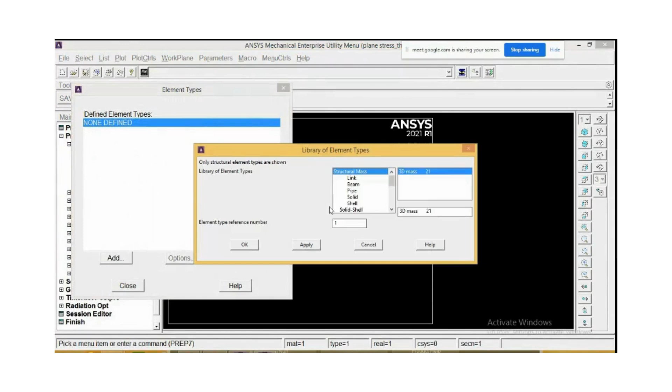Now we are solving a plane stress problem for the thin pressure vessel. For that purpose, obviously, preference is structural. Okay, preprocessor. Under element type, we will add a solid element, PLANE182 quad. Go to the options, make the element behavior plane stress with thickness. Okay, close that element. Real constant.

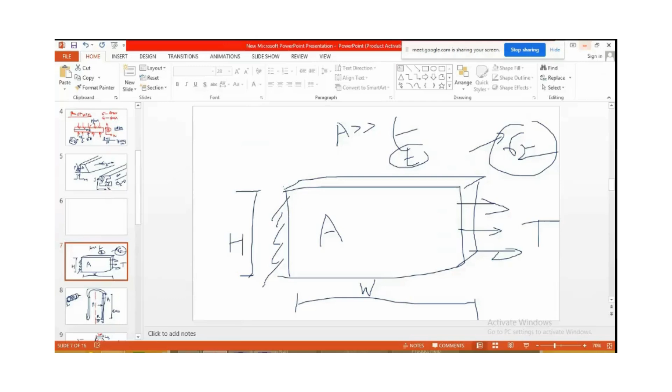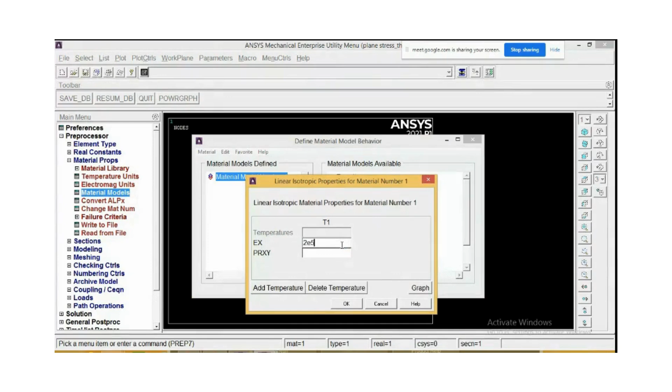We are doing the axisymmetric problem. You observe here for the pressure vessel, we are plotting the area and we will plot the result for 360 degrees by considering one single strip. So we will not give a real constant as input. Directly we go to the material property, material model, structural linear elastic isotropic, 2E5 and 0.3 as Poisson's ratio. Okay, material model is defined.

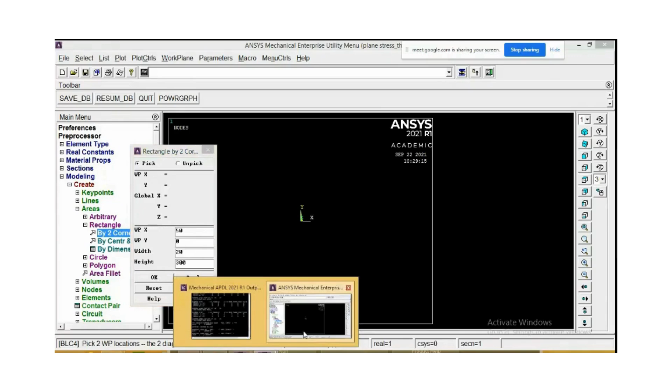Now modeling, create area by two corners. Radius is 50, so x will be 50, y will be 0, width is suppose 20 and height is 300. Okay, so it will plot this strip, this area. Once you click on OK, right now this is the thickness, you get the strip. Because the pressure vessel is subject to internal pressure, it is an axisymmetric problem. So about the y-axis it is symmetric, right?

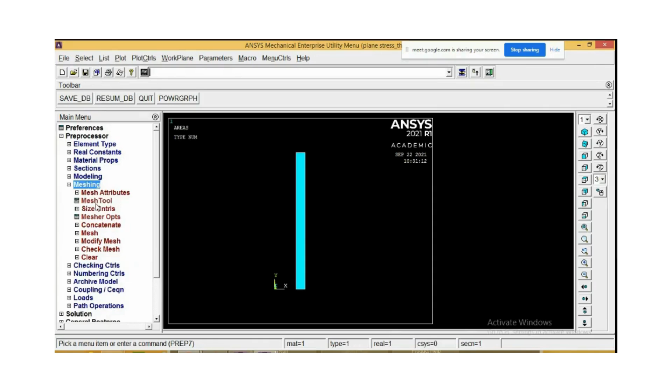So we are only taking one cross section area, and we will apply the pressure and evaluate the result for the overall pressure vessel using axisymmetry. Then go to the mesh tool, set area, apply. I will assume 5 mm as the element edge length. Go to the mesh tool again, map meshing, mesh, select the area. You can observe 20 width is there, so 4 elements are created, and 300 mm is our height.

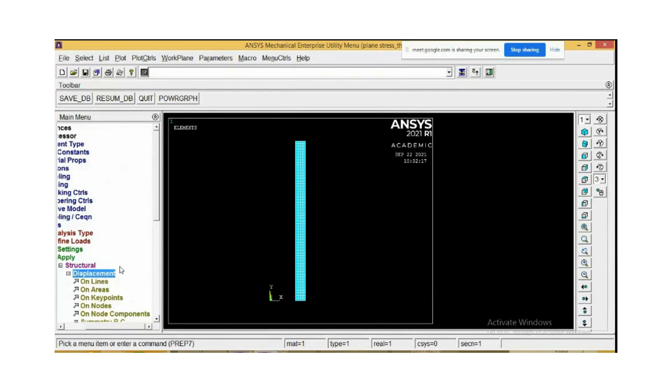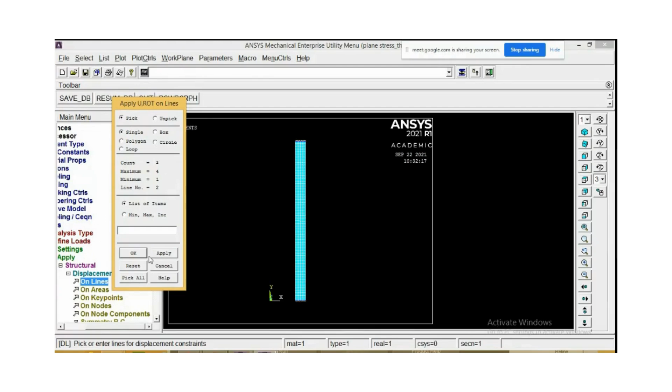Meshing is done. Now we apply the load, define the load, apply structural displacement on lines. We'll select the bottom and top edges because here the ends are welded. So at the weld location, we consider these as the constraints. Apply. All degrees of freedom are 0. So you can observe here the constraints are being applied.

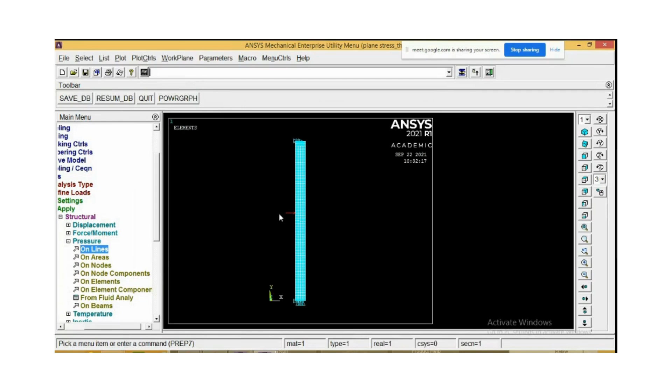Now we apply the pressure on line again. Select that inside line, apply, and we will apply suppose 1000 Pascal. The pressure is towards the area, internal pressure, so direction is correct. You apply it with a positive magnitude. Then solution, solve current LS. Sorry, this is showing that the real constant set is undefined.

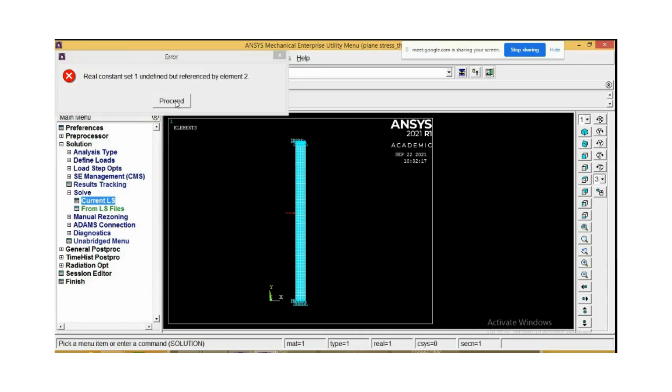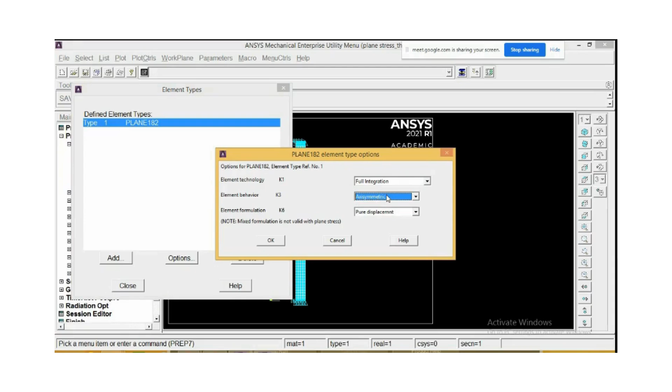So we will go to the preprocessor, element type. Instead of the behavior plane stress with thickness, we use here axisymmetric. Make that change. Element behavior is axisymmetric. Instead of plane stress and plane strain, under element behavior you have to use axisymmetric for this problem. I forgot to define that. Now go again to solution, solve current LS.

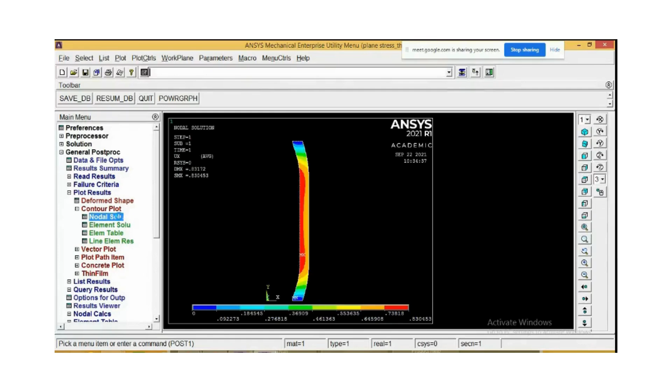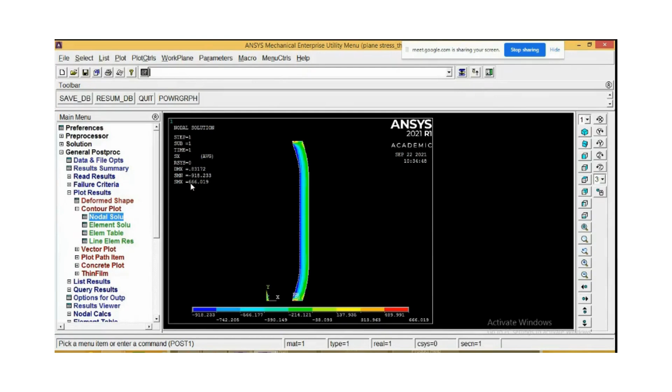Now solution is done. Now you can observe the result, general postprocessor, nodal solution. First we plot the DOF solution, displacement vector sum, or x component of displacement. This is the x component of displacement. You can also get the y component of displacement. We'll observe the stress value, stress x component, apply. You can get the maximum value of stress is 666 megapascal. Y component, apply, right?

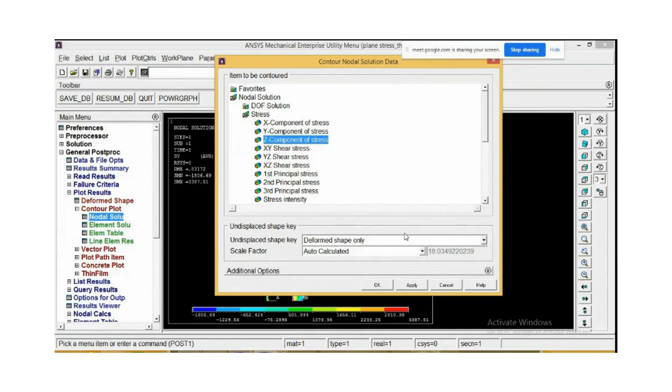It is 3387. What is the z value in a plane stress problem? What will be the z value of stress? We are solving the plane stress problem. So what will be the probable value before getting the contour plot? Can anyone guess what the z component is? Yes, anyone? What is the stress value for the plane stress problem along the z direction?

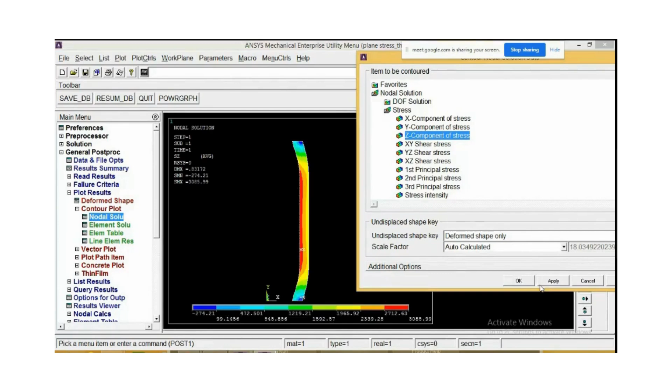Yes, 0. Right, Bhakti and Vishwajit and Pranam. Okay, so we will check whether it is 0 or not. Apply. Z component, right? Due to the axisymmetric nature and the diameter to thickness ratio, probably that will be 0, but due to that nature, we will again check with the element type.

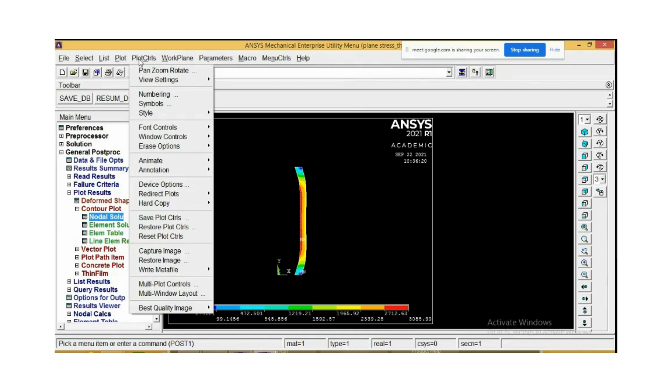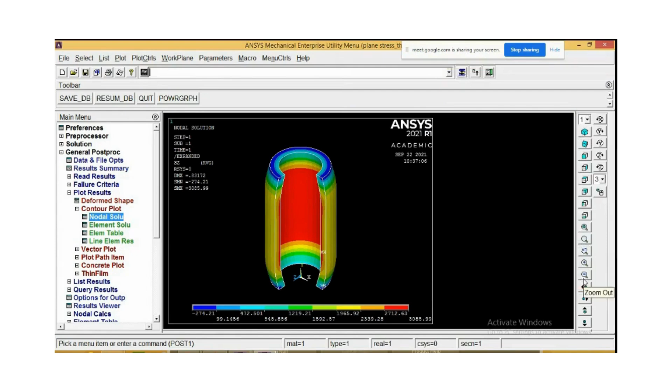Before that, I will show how to look at the style: axisymmetric expansion, cyclic expansion. Plot control, style, axisymmetric expansion, 2D axisymmetric problem, 3/4 expansion, apply. Go to isometric. You observe that by using the single strip, you can evaluate the result for the overall pressure vessel.

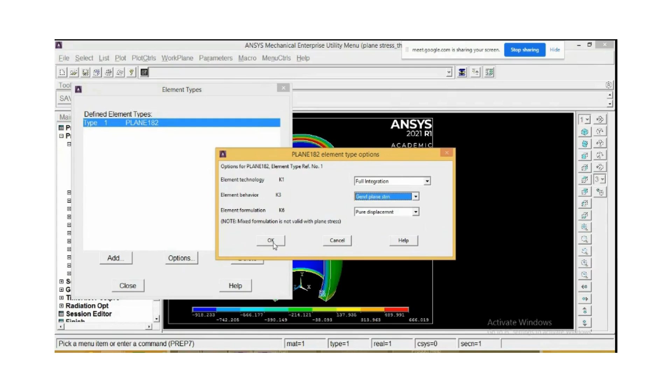Preprocessor, we will change the element type behavior from axisymmetric. We will consider it as a general plane stress problem. Solution.

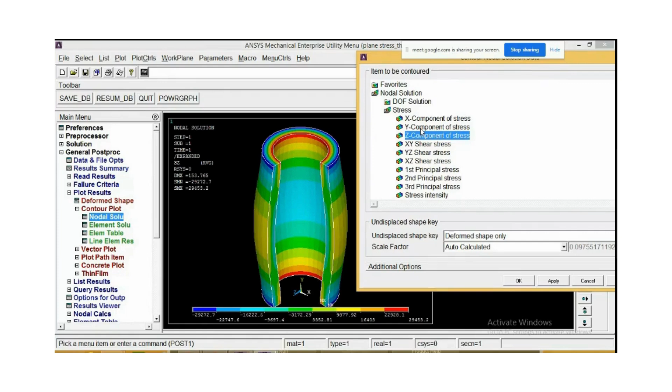XY. Now shear stress you can observe, because this geometry is circular, right? Actually it will be showing 0, but in the geometry we have drawn, the z direction may be considered differently; the orientation may be different. But you can observe the shear stress value: shear stress xy is present, tau xy is present. You get some value here, but the shear stress along yz is showing 0, and along xz it is also showing 0 value.

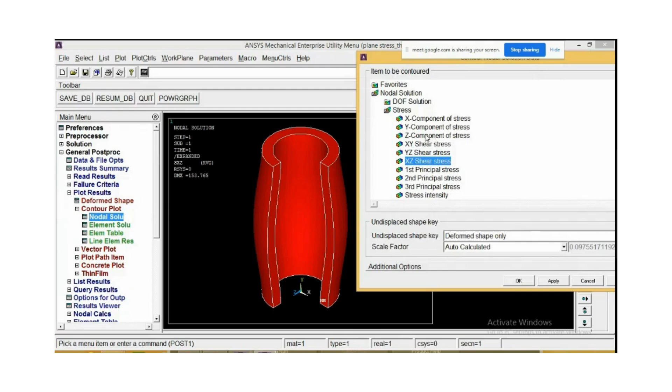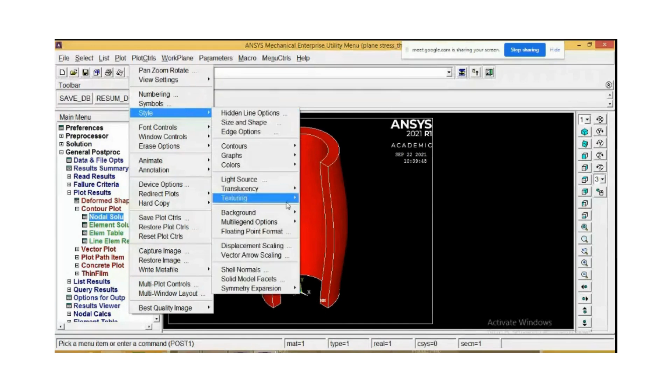So shear stress in that plane will be 0, right? We are getting the displacement because of the nature; it must be zero theoretically, but we are not getting that z component. The shear stress yz and xz components are all zero; you don't get any value here. So this is the way you can evaluate the result for the pressure vessel.

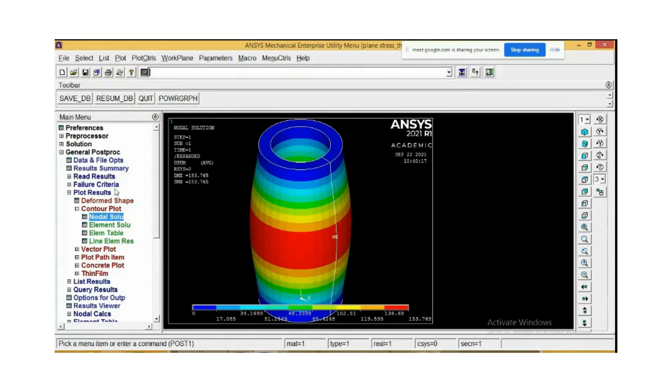You can observe we only drew the area, a single strip of cross section, but you can evaluate the result for the full pressure vessel. So whenever there is an axisymmetric problem, you can use that axisymmetry to get the result for the overall cross section. Now this is symmetric about the y-axis. The geometry is symmetric about the y-axis.

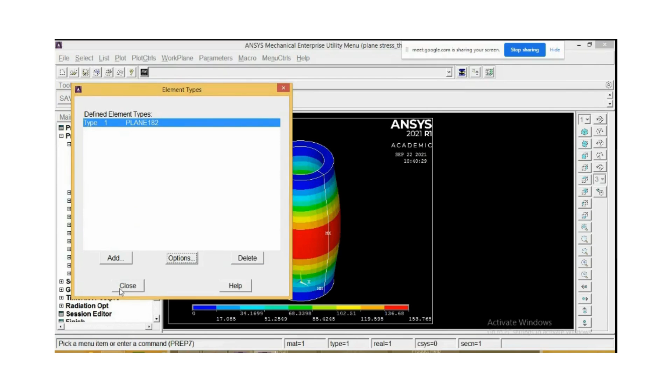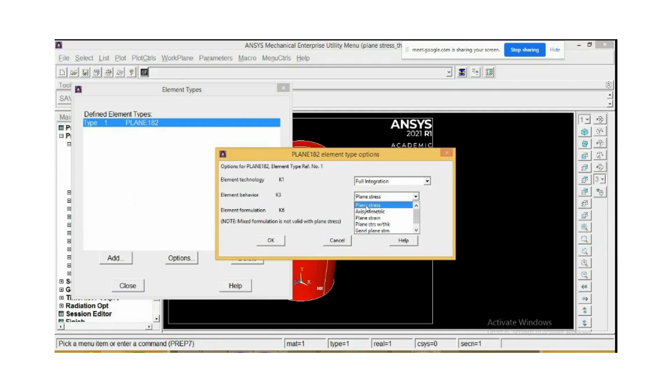Plane stress. Again we solve. Now we again go to the result, using nodal solution. We will plot the result of stress along Z. Apply. I have taken the wrong one. So you can make the changes to the option: instead of the first option, you have to select plane stress. The type of problem is plane stress, so click on plane stress. Close. Go to the solution, solve, and in general postprocessor view the result, nodal solution.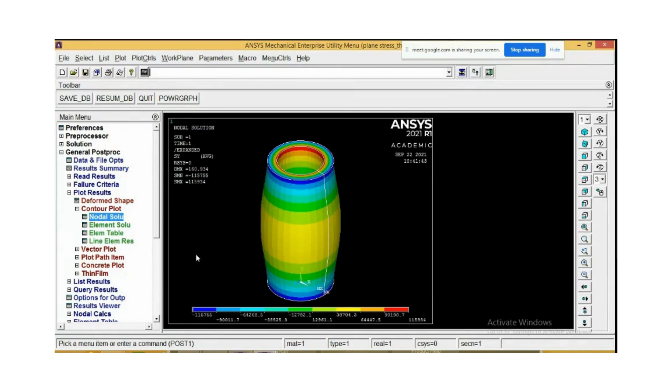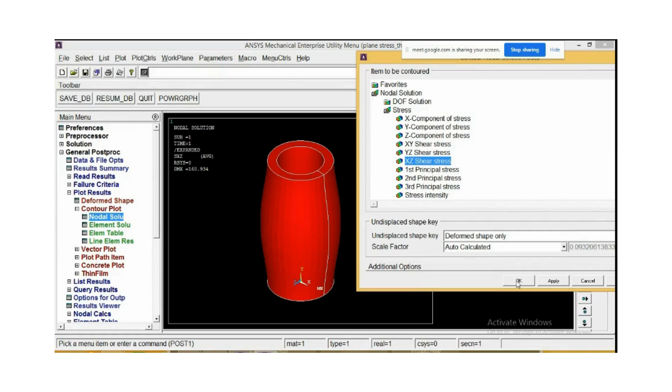X component is there for the pressure vessel. Y component of stress is also there, that is normal stress along the Y direction, but normal stress in Z direction will be zero. Similarly, you can observe the shear stress in XY plane is present. You get some 25,000 value, but in YZ you get zero value, and XZ is also zero. So this is the plane stress problem.

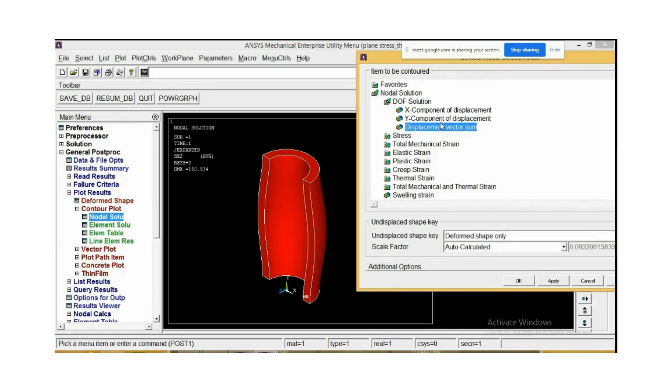By default, it is a plane stress problem. So you can use axisymmetry. You can use that axisymmetric problem to tackle such types of problems. Plane stress problem. Use of axisymmetry.

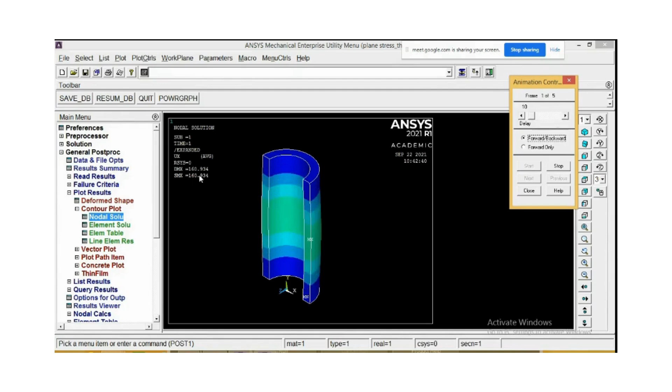So you can observe that after applying the pressure, the ends are constrained. The pressure vessel is subjected to a deformation, and 160 mm deformation is a very large value for the cross section we have considered. So it may fail. Observe the stress value, X component of stress. Sorry, I have to stop that animation. You can observe the nodal solution X component of stress.

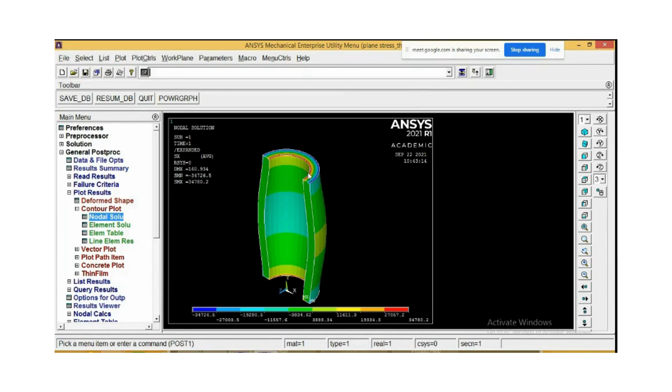This is 34,780. So it is exceeding the yield or ultimate value, and it may cause failure of the pressure vessel near the weld joint; in the Y direction, it may fail again at the weld location. So this is the way you can use symmetry or an axisymmetric problem.

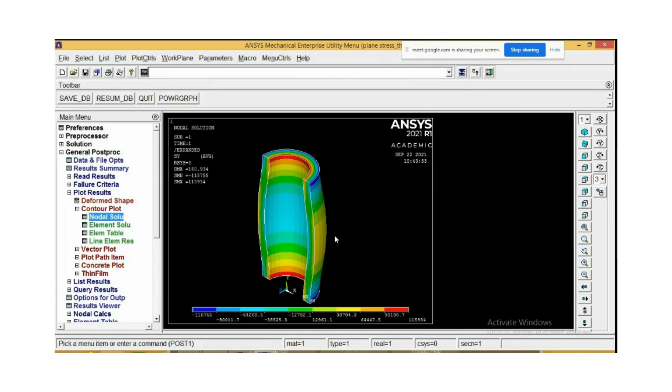2D axisymmetric problem. This is applicable not only to pressure vessels but also a flange, a gear, a flywheel, right? You can model that and solve. Make sure that in the element type you have correctly defined the element type option, that is axisymmetric.